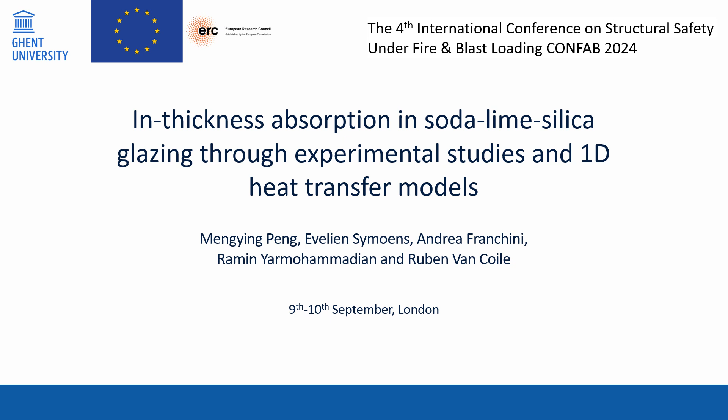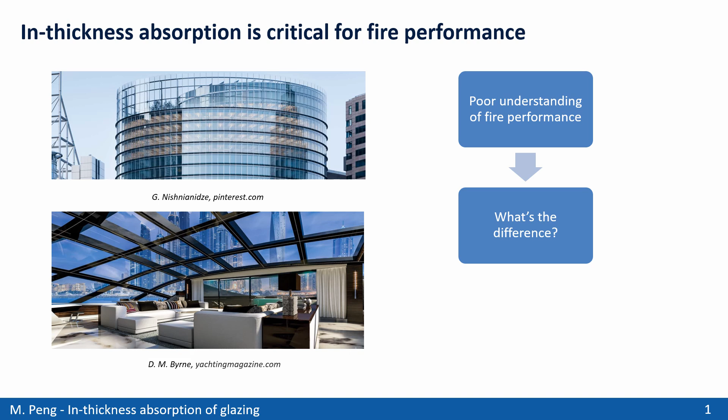In modern society, glazing is increasingly regarded as a load-bearing material in buildings. However, the fire performance of glazing hasn't been fully understood yet, and a key distinction between glazing and other common building materials with regard to fire performance is related to the existence of in-thickness absorption.

Therefore, this study provides preliminary investigations into the effects of in-thickness absorption based on both numerical and experimental studies.

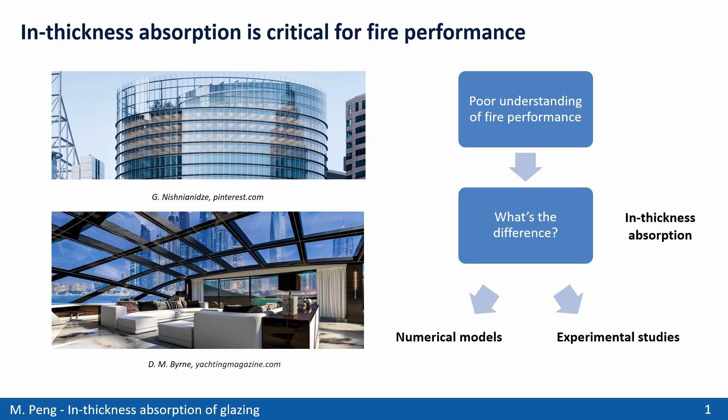A heat transfer model is applied in this study to investigate the influence of in-thickness absorption. The glazing element is divided into slices. On exposed and unexposed surfaces, both convection and radiation are considered.

As is known, glazing is a transparent material. Therefore, when it's exposed to radiant heat, part of the radiation will be transmitted through the glazing thickness. According to a previous study, the interior part of the glazing actually absorbs part of the radiation from the transmitted thermal radiation.

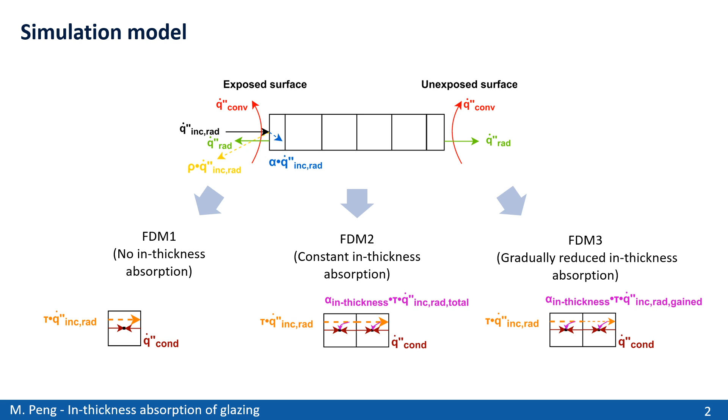Therefore, to investigate the effect of in-thickness absorption, three different situations are considered for the interior part of the glazing elements. In FDM1, in-thickness absorption is not considered. In FDM2, in-thickness absorption is considered from the total incident radiation, and is therefore constant in each slice. In FDM3, in-thickness absorption is considered from the gained incident radiation, and thus is gradually reduced with distance from the exposed glazing surface.

The figures here present the results for temperature and relative temperature difference through glazing thickness at various times. From the results, we can clearly see there is an increase in glazing temperature after considering in-thickness absorption, which is up to around 10%. However, the difference between FDM2 and FDM3 is very limited, less than 1%.

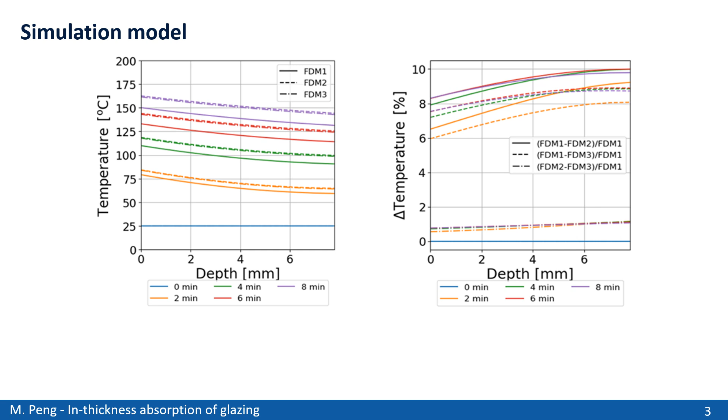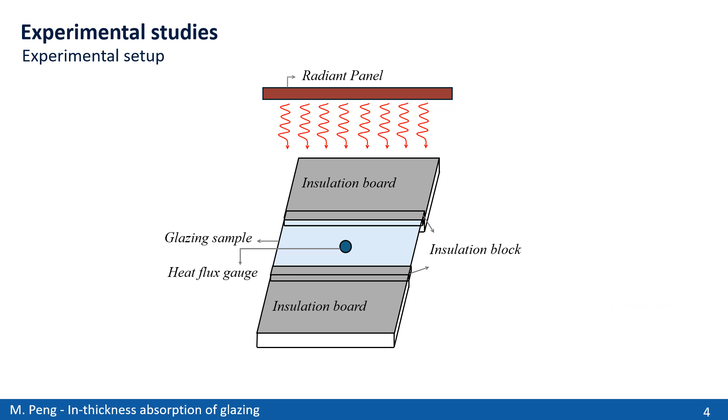Then I'd like to talk about the experimental part. During our experiment, a radiant panel is placed parallel facing downwards to irradiate the glazing sample.

Each glazing sample has a thickness of 7.8 mm and is placed 42 cm from the radiant panel. The intensity of the radiant panel is 60%, which can generate a heat flux of 25 kW per square meter on the front glazing surface.

The heat flux measurement on the front glazing surface is denoted as HF1. When the heat flux gauge is placed behind the glazing sample, the heat flux measurement is denoted as HF2 when the glazing sample is not present, and as HF3 with the glazing sample in place.

In total, 3 different experiments are conducted in this study. Experiment 1 is intended to find the steady-state threshold, and 4 thermocouples are affixed to the glazing sample by applying aluminum tape on both sides of the thermocouples.

Experiment 2 is the manually attached experiment. The experiment setup is the same as experiment 1 during the heating phase. However, in the cooling phase, after shutting down the panel, an insulation board is placed between the radiant panel and the glazing sample, and at the same time, 2 thermocouples are manually attached to the glazing sample.

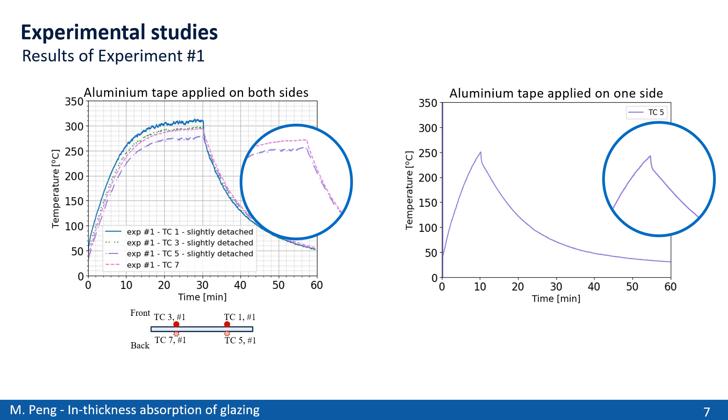Furthermore, the anomalous drop cannot be observed in the backside thermocouples when aluminum tape is applied on both sides, while such a drop can be observed in the backside thermocouples when the thermocouples are only covered by aluminum tape on one side. This is because applying aluminum tape on both sides of the thermocouples helps block the thermocouples on the unexposed side from direct front radiation.

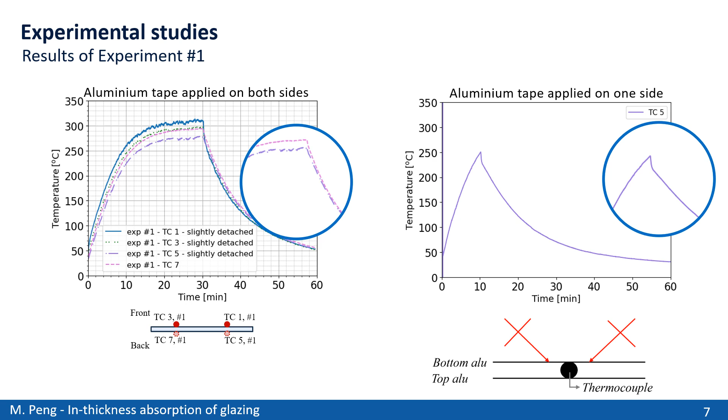Now I'd like to show the results of experiment 2. As mentioned before, an insulation board is placed between the radiant panel and the glazing sample. Therefore, these two manually attached thermocouples are expected to return accurate temperature measurements. By comparing the results of the other thermocouples with these two manual ones, their accuracy can be confirmed in the cooling phase. From the results, we can see the temperature curves of the manually attached thermocouples are similar to the others, so the experimental results in the cooling phase can be confirmed.

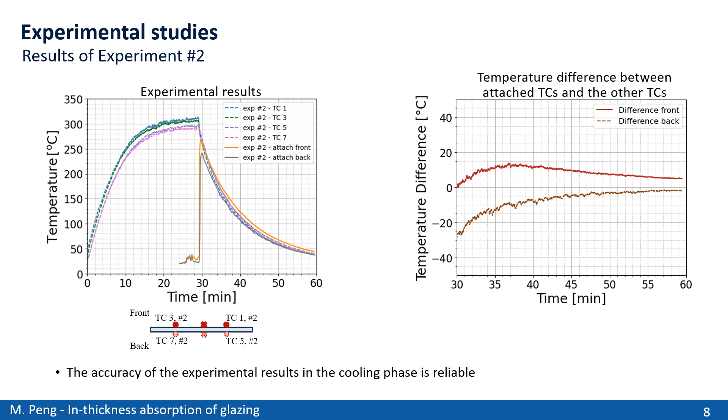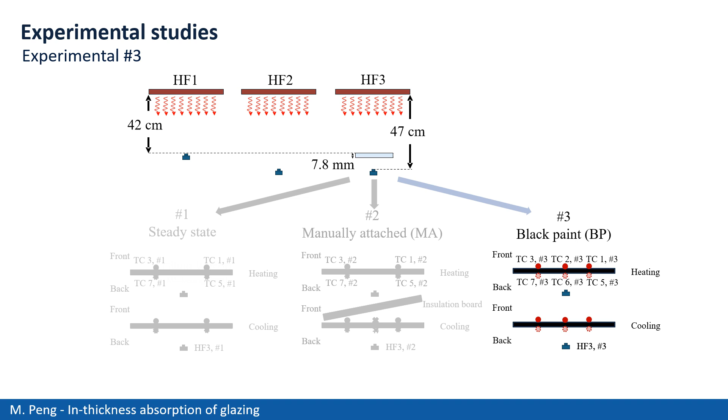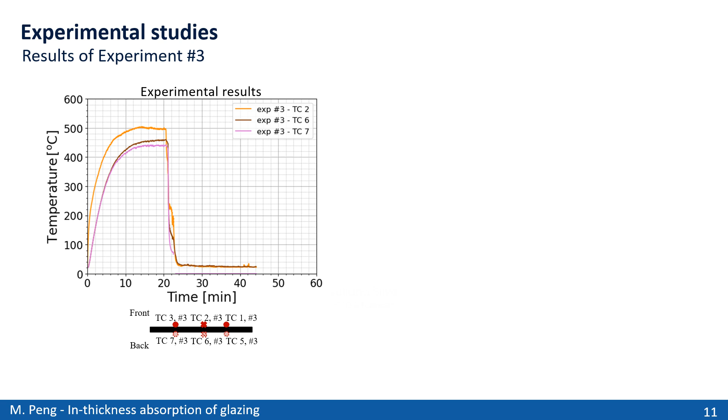Finally, I'd like to show the results of experiment 3. From the graph, we can see the experimental results of experiment 3 are much higher compared with the other experimental results. This is because after the glazing sample is sprayed black, the transmitted part is confirmed to be very limited, and therefore the absorptance is much higher.

So in our simulation input, we assume the absorptance is equal to 1. Despite this simplified scenario, there is still a clear difference between the simulation model and the experimental results. This indicates there may be an issue with our traditional application of thermocouples on the glazing surface for temperature measurements, and also the model input needs to be further checked.

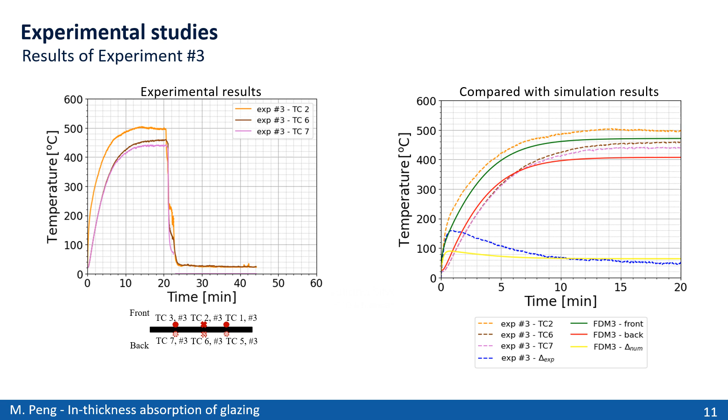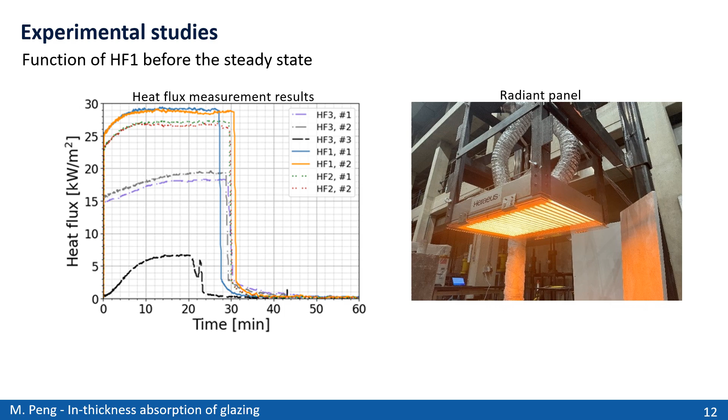The emissivity and transmissivity can also be calculated based on the experimental results. After shutting down the panel, an inflection point can be observed on the heat flux curve, and this is denoted as the emission energy from the heated glazing sample.

The emissivity can then be calculated based on this value and the back glazing surface temperature at this inflection point, and of course also by considering the view factor, as there is a distance between the glazing sample and the heat flux gauge. The transmissivity can also be calculated by considering the transparency of the glazing sample and this emitted energy from the heated glazing sample.

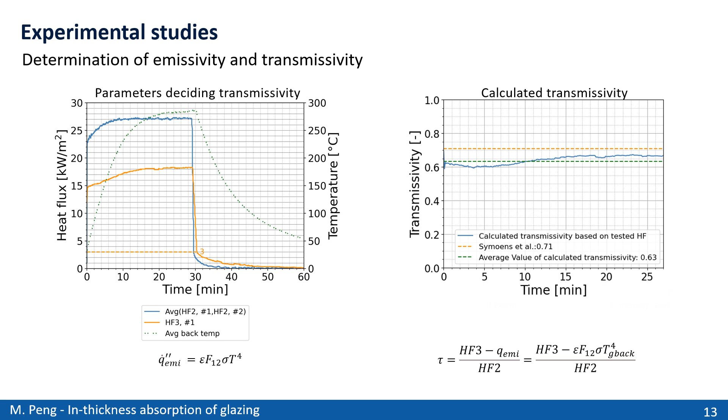So a re-evaluation of these key parameters is in process.

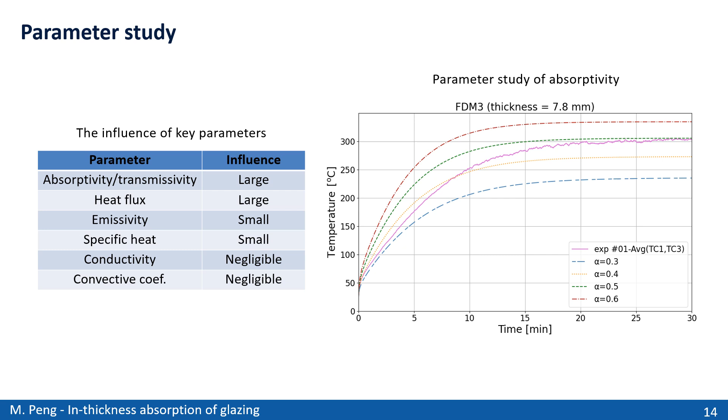In conclusion, the in-thickness absorption has a significant influence on the glazing temperature increase. Based on the parameter study, the most influential parameters for glazing surface temperature are absorptivity and heat flux. A temperature difference up to 70 Celsius degrees can be observed when comparing the experimental results with the simulation results, and this might be attributed to the thermocouple measurements and the model inputs.

Therefore, further investigations are suggested to be conducted on the thermocouple measurements, by considering the direct front radiation and the thermal resistant contact between the thermocouples and the glazing sample. An appropriate model input also needs to be further confirmed.